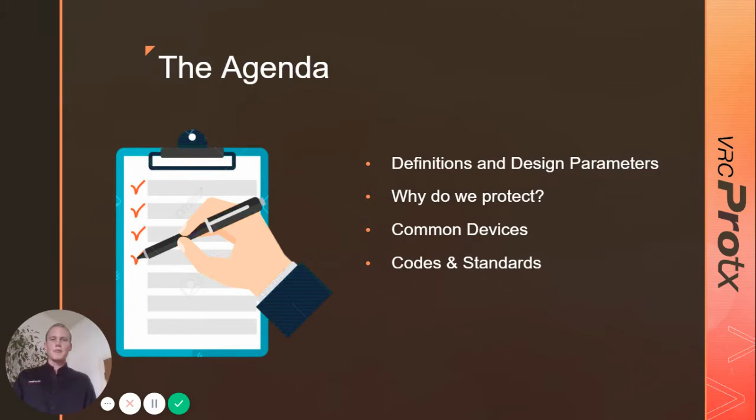Today I'm going to go through some of the definitions and common design parameters used in the overpressure protection field. I'm going to discuss the history and why pressure relief and overpressure protection looks the way it does today, common devices that are used for pressure relief, and then I'm going to go through some of the codes and standards.

A pressure relief device is any device used to prevent excess pressure or vacuum from accumulating in a vessel. The MAWP is the maximum gauge pressure permissible at the top of a process vessel or storage tank in its normal operating position. Set pressure is the pressure that the pressure relief device opens. Typically, that's the MAWP of the vessel.

Accumulation is the amount of pressure that builds while the relief device is open. Capacity is the amount of fluid per unit time that the device passes, and back pressure is the amount of pressure at the outlet of the device.

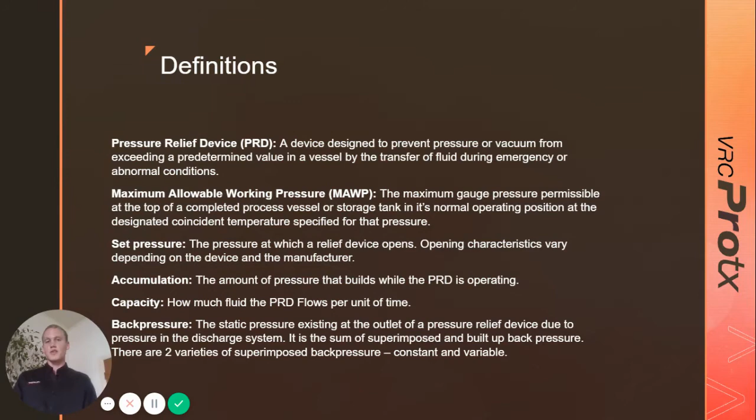Industrial pressure relief has its origins in the late 19th century. At the time, industrial boilers were used widely, but there were no codes or standards used to design them. There were several large catastrophes that prompted regulatory action, including the Sultana disaster in 1865, which is one of the largest single disasters in U.S. history. There were also several shoe factory explosions on the East Coast.

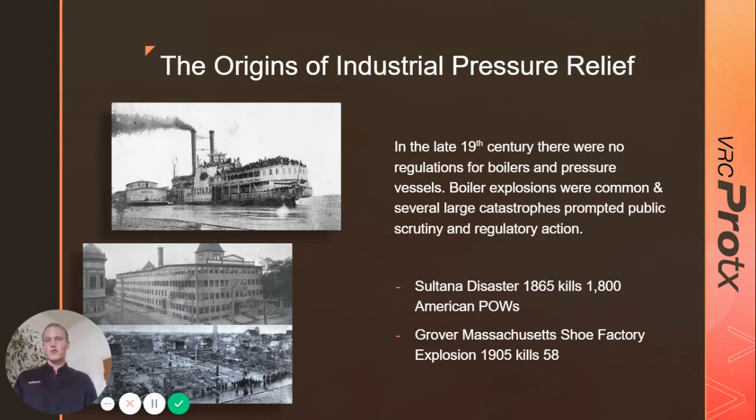The most common devices used are rupture discs, pressure relief valves, and pressure vacuum vents. Rupture discs are devices that don't reseal. Once you open them, they stay open and you have to replace them. Pressure relief valves are what you're going to see on top of a boiler, and pressure vacuum vents are used when the set pressure of the device is below 15 pounds gauge. You typically see them in tank farms or storage tanks.

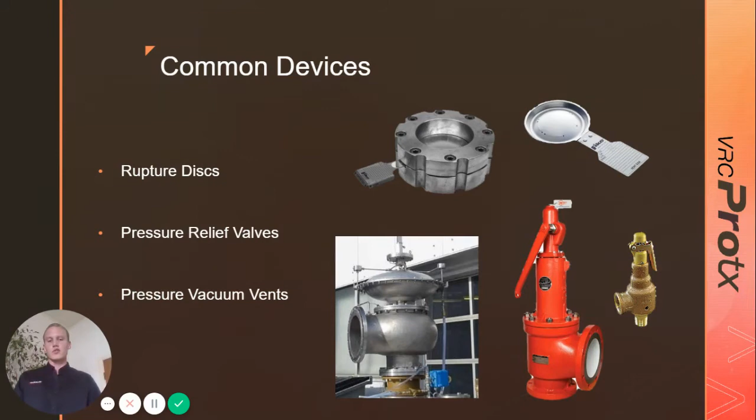You might also see in the oil and gas industry a HIPPS system, which is an automated isolation assembly. So instead of relieving the fluid into a complicated pressure relief system or storage tanks, a HIPPS system isolates the pressure source from equipment that would be damaged by pressure surges.

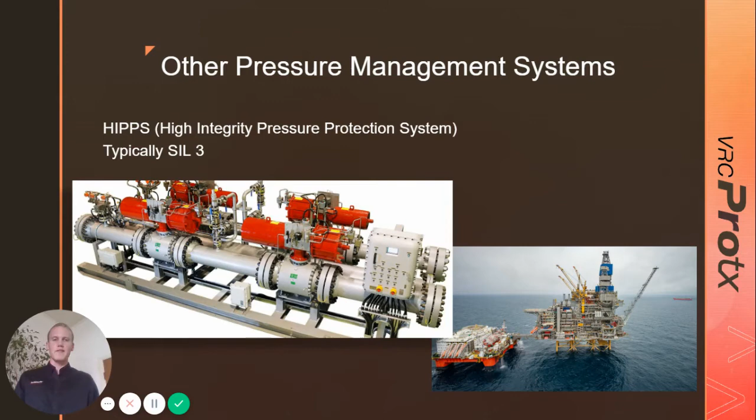The most important body in pressure relief is the American Society of Mechanical Engineers, which was founded in 1880. The first edition of the Boiler and Pressure Vessel Code was issued in 1915. That document is still used today, although it's been updated several times, including in the 50s and 60s at the dawn of the nuclear age. It's important to note that ASME only governs vessels with an MAWP of 15 pounds gauge or greater.

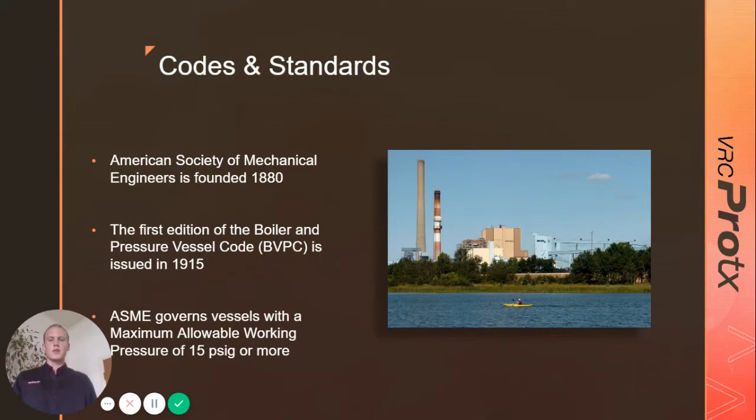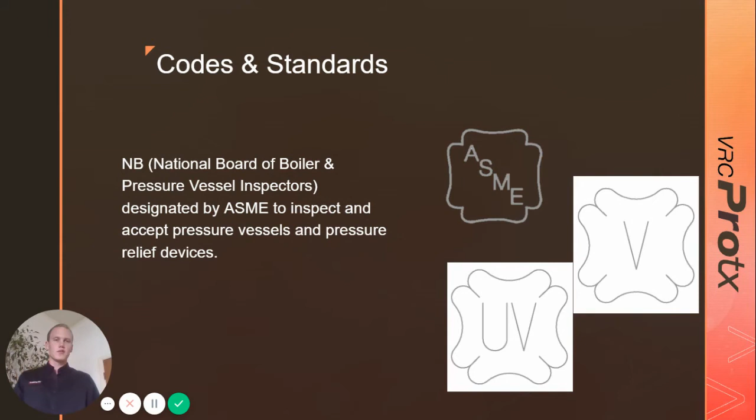The National Board is designated by ASME to inspect and approve pressurized vessels and pressure relief equipment. So if you ever look at a pressure relief device, you'll see some of these stamps on them if they're a code stamp device. Code stamp pressure relief devices can only be repaired and certified by an organization that holds a VR stamp.